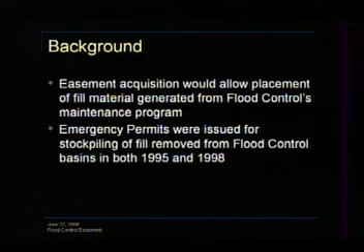Fill material from flood control projects has been placed on the subject parcel on 2 separate occasions in the past. In both 1995 and 1998, emergency permits were issued on this parcel, allowing the placement of a total of 6,000 cubic yards of material removed from flood control activities.

Government Code Section 65402C requires the planning agency to consider the location, purpose, and extent of the proposed easement for consistency with the comprehensive plan. I would like to note that the planning agency does not have the ability to condition a 65402 determination.

Along with other elements of the comprehensive plan, because of its location, the Toro Canyon plan also applies to the subject parcel. The project site is located at the intersection of East Valley Road and Toro Canyon Road. It is currently vacant and zoned residential.

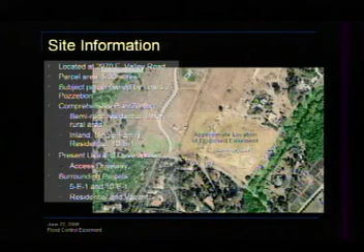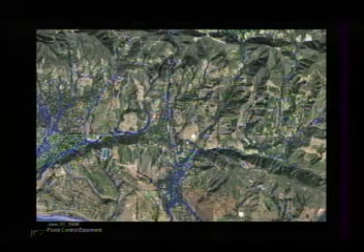As currently proposed, the easement would include the entire area of the subject parcel, APN 155120061, known as 2970 East Valley Road. The purpose of the easement would be to allow the deposition of fill material removed from flood control debris basins, channels, and watercourses. The easement would be used only for placement of fill. The amount of fill material to be deposited on the easement would be dependent on weather events and the availability of alternative sites. That quantity is unknown at this time.

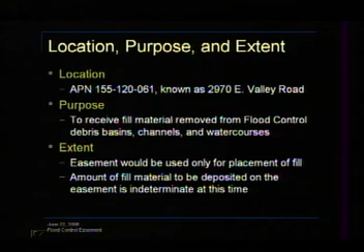The key policy considerations in this case are those policies protecting visual resources, grading policies, biological habitat protection, recreation, and noise. The following slides summarize the applicable policies and development standards.

Because of its location, topography, and lack of vegetative cover, the subject parcel is visually prominent from both East Valley Road and Toro Canyon Road. If visual impacts of the grading activity associated with the proposed easement are minimized with mitigations, such as appropriate landscaping, fill minimization, and fill dispersal, then the acceptance of the proposed easement would be consistent with these policies and development standards.

Additionally, the land use element contains policies promoting minimization of grading and protection of natural landforms. Staff acknowledges that sediment material removed from flood control elements and watercourses must be deposited at some location. Depending on the quantity of fill material and the manner in which it's placed, the acceptance of the proposed easement is potentially consistent with these grading policies.

As mentioned previously, a designated Southern Coast Live Oak riparian forest environmentally sensitive habitat is located opposite Toro Canyon Road. The subject parcel contains a portion of the required 50-foot setback from that ESH. Also, a designated wetland is located on the parcel immediately west of the subject parcel, and the Toro Canyon plan requires a 100-foot setback from that wetland. Although the easement includes these ESH buffer areas, flood control staff stated that grading activities would not take place inside these buffer areas. As long as the activity associated with fill placement on the proposed easement avoids disturbance to the ESH and ESH buffer areas, the acquisition of the proposed easement would be consistent with these policies and development standards.

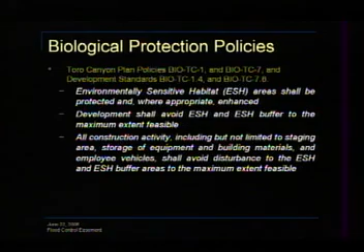A 10-foot wide trail easement is located immediately adjacent to East Valley Road right-of-way. Condition 2 of the parcel map that created the subject parcel restricted all encroachments within this dedicated easement, which would inhibit the safe use of the trail. The trail easement is not yet improved or in use. If the flood control easement is acquired, heavy equipment would likely cross the easement over the existing driveway which crosses the trail easement. The proposed flood control easement would be consistent with this policy and development standard if trail use is not established during its lifetime and if appropriate mitigation measures are employed, such as landscaping.

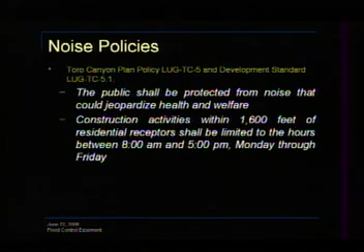The Toro Canyon plan includes time limitations on construction activities near residential receptors. The parcel map which created this parcel also contained a condition limiting the timing of the activity. If the most restrictive time limits were placed on construction activities allowed within the proposed easement, and if construction equipment was maintained properly, the acquisition of the proposed easement would be consistent with this policy and development standard.

In conclusion, pursuant to Government Code Section 65402C, staff recommends that your commission determines that the acquisition of the flood control easement is potentially consistent with the comprehensive plan and transmits the consistency report required by Government Code Section 65402C to the County Flood Control District and the Board of Directors of the County Flood Control District. The staff report and the letter reflecting the Planning Commission's action would constitute that required report. That concludes staff's presentation.

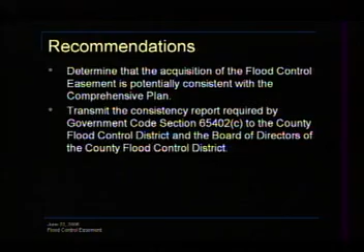Thank you. Any questions? Commissioner Brown. Thank you, Mr. Chair. I see that Ms. Spencer from Flood Control is here, so I have a question for her.

Mr. Gullett indicated that grading will occur near the ESHAs, but it'll stay outside of the setbacks. How do they know where these setbacks are? When they're out there grading, do you go out and inspect? What kind of assurances are there that these ESHAs are in fact protected?

Good, Commissioner Brown. Basically what happens in emergency situations and also routine maintenance is both myself and other flood control personnel are out at these sites. We could easily flag these areas and keep people out of them. Okay, thank you. All right, thank you.

Commissioner Cooney? I have a question for flood control as well, although Mr. Gullett, you should feel free to chime in. It looks to me that the prior use of this particular parcel for the deposit of flood materials has actually changed the landform already.

I noticed that twice emergency permits were used, but in the second instance, at least, a land use permit was issued to allow the material to remain in place. And what it looks like to me from the corner of East Valley and Toro Canyon, there's actually been an increase in the elevation of the property, which is creating a wall-like feature at that corner. So someone approaching that looks at this substantial deposit of former fill. Is that an accurate perception? Is it actually building up what was the natural altitude of the land at that corner?

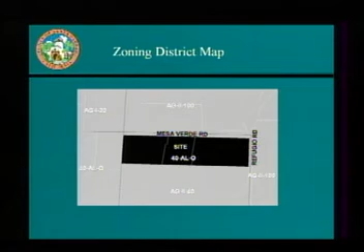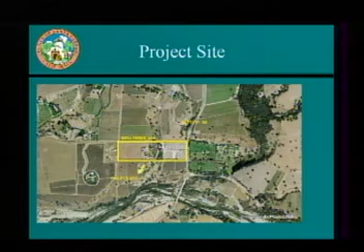This slide shows the site itself, and from it you can see that the facility is easily divided into 3 sectors: the upper, central, and lower sections. The next slide shows this in a little bit more detail.

The proposal in front of you encompasses the activities of an existing equestrian facility that has been in the area since the 1960s. It provides an arena and riding facilities for approximately 400 members of the association, with an average of 6 members and their horses using the facility daily. There is also a therapeutic riding program using the facility 3 to 4 times a week, with 6 horses that are the only permanent residents, other than the people.

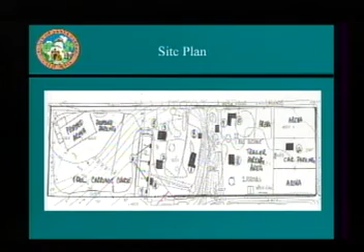They also request to host 39 equestrian events and 1 fundraiser each year as part of their conditional use permit. The next slide shows the trailer parking area and the 2 arenas on the right that are consistently used for horse shows—one for warm-up, the other for the horse show itself. It should also be noted that figure number 8 on this map is a 240 square foot horse shelter that has been designated for removal in order to protect the stream bank of the stream that runs through the middle of the property.

The proposal today is for a consistency rezone from 40-AL-O to AG-II-40, and a major conditional use permit to validate an existing daily use of a commercial, albeit nonprofit, stable riding and boarding facility with a maximum of 40 special events.

These events have been divided into two categories, conducted between April and October annually. This site has traditionally had between 12 and 24 events and presently holds approximately 30 events. The applicant is asking for an additional 10 events, to be identified later, but limited to fewer than 100 attendees.

The two categories we've divided the events into are: events which involve humans and horses, with attendees divided approximately 75% participants and 25% assistants and spectators—people coming to help the participants. You can see the numbers for each proposed event.

The second category is events that require the importation of cattle, including cutting, team penning, and team sorting. We've averaged the number of cattle to be roughly equal to the number of horses in these events, even though the cutting shows will probably use more cattle than the team penning.

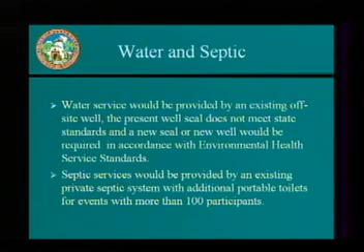As far as services, the fire station at Airport Road provides fire protection. Access is provided via Mesa Verde Road, and the parking areas on this site can roughly handle 60 trucks and trailers and 28 cars.

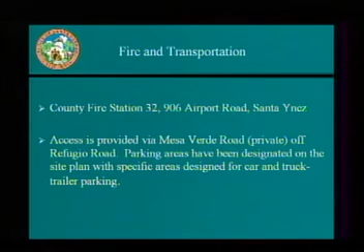The project as proposed has been determined to be consistent with all applicable comprehensive plan policies and zoning ordinance provisions. I would like to note that the findings in the staff report refer to the Planning Commission, but they should refer to the board.

We would like to recommend that your commission's recommendation to the board include the following 4 items, and I'd be glad to take any questions.

All right, thank you very much. Any questions? All right, we'll go to the applicant.

The applicant would like to speak. Thank you. Mr. Rigel?

Chairman Valencia and members of the commission, thank you for the opportunity to speak before you today. Can you hear me all right? My name is David Hunsaker, and I'm currently the executive director of the Santa Ynez Valley Equestrian Association.

I'm relatively new to that position, having served previously in the mid-90s during the formation of the organization as its president, and have been asked to come back on board to help them hopefully get this conditional use permit granted and deal with several other financial concerns we have there.

I'd like to start by saying we have a deep appreciation for the work that Shelley has done on our behalf, and we find nothing within her requirements that we feel we could not live with. If you would allow me, I'd like to give you a brief history on our center.

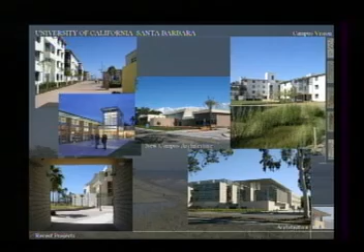This building's currently under construction. As you know, we have a lot of construction on the campus if you've been out there recently. In fact, the last one that comes up is one we're really excited about.

Upper left is our new graduate student housing by Fields Devereux, Los Angeles. This is on the historic campus site, on the west side of campus out by the historic fields. 976 beds of graduate student housing with 976 parking spaces. If you drive on El Colegio today, you'll see this. It's a huge construction site, 4 blocks long.

It's hard to miss. Top right is our new student resource building. This finishes this summer. It's by Sasaki, San Francisco. This is essentially a student meeting building. It's a piece of what used to go into student centers across the country. Those centers have turned into more of a retail complex, and this sort of building is growing out of that, because student groups still need a place to meet. We're not the first to build this, but I think this is a very interesting building for its social diagram.

Center of this slide is a building by Kallmann McKinnell & Wood from Boston. 3 buildings, actually. Michael McKinnell's the lead designer. He designed Boston City Hall. Again, a very exciting complex.

The building on the left of the 3-building complex is our new Center for Film, Television, New Media. It's a fully donor-funded building, the first fully donor-funded building on our campus. I think this is an important trend for the future of the campus, what you'll be seeing more of. This is funded by a series of donors, including some of our alums.

Very exciting. The center building is a social sciences building. The right building is our new Graduate School of Education. We hope to start construction on this series of buildings this fall. We're in the middle of, like any project that's bid recently, a series of budget issues that we're working on. I think we're pretty close.

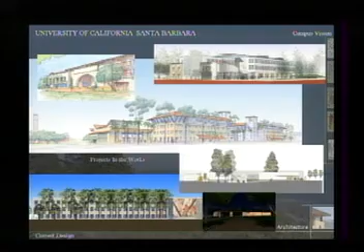Lower right, a project we're very excited about, in the early design phase, is a new gate for the east entrance to campus. If you come to campus today, starting Monday we've ripped up the road, there's a lot of construction activity out there. Ultimately, we'll have a new stone gate feature. You can see the night version of it there.

We're going to have a new driveway. The stoplight goes away, and a circle will be built in its place. There's a lot of change for the east side of campus. All new landscaping, graphics, really transforming the east side of campus.

We like the ocean, the lagoon, the mountains. There's a theme: the East Bluffs, the Pardall Corridor, the landscape corridor, the academic green on the east side of campus, and the rec facilities. We didn't really identify our buildings as a strength on this campus. We said really the strength of the campus was the piece of real estate, the surrounding, this sort of asset of being in this incredible location.

Things we didn't like about the campus: some of those old military buildings, the trailers, cargo containers—both of those are disappearing this summer, by the way. We were out this morning again looking at that. Loading docks with ocean views—this has already been taken care of.

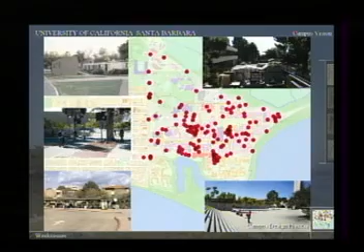We're working on it: the plaza, historic plaza, the bus drop-off, which is just sort of a tough space, and the interface between bikes, pedestrians, and cars. This is something we've grown used to, but urban designers and planners really have a hard time with that interface, and how do you fine-tune it? We love the bikes—they're a great alternative means of transportation for this campus, but it is difficult. The interface is a bit difficult because the bikes don't stop, as you know, if you've been on our campus.

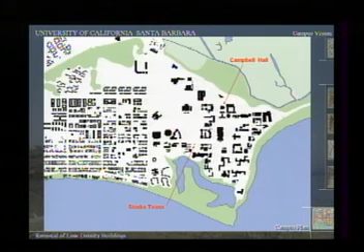In terms of density, this was a figure ground drawing—you've seen these before from architects. Black represents buildings, white is open space. The left side of the slide is Isla Vista, which is a very fine textured, high density area. On the right is the campus, which looks fairly built out. Architects do these drawings to see where you might find space for future development, to think about how you might utilize the campus. If you take away the military buildings, the trailers, the containers that have turned into offices, and I think one permanent building, you can see that a lot of open space opens up on the campus.

Think about connecting those spaces. You suddenly see these great malls that can cut across the site and really connect it out to the ocean, the mountains, the lagoon. The big idea here is to connect the core campus to the landscape, to say, okay, this is our great asset—how do we utilize it to its maximum potential? We know today that if you stand in the middle of the campus, you oftentimes can't see that site. We want to rectify that.

Another major space goes from Storke Tower, again leading up to a mountain view on the north. Probably the most important is a north-south space that goes from University Plaza and our new alumni house down to the lagoon. Then secondary and tertiary paths across the campus, again always oriented to the view. So you're creating these great view corridors out from the site.

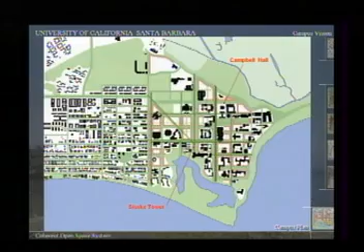Overlaid with open spaces, what you might see in terms of quadrangles and the parks that would develop in and around the campus. Building sites—because when campuses do this, we're always interested in the carrying capacity: what could you build on this site if you did decide you were going to grow? This starts to establish where building sites might occur, and then in red, where those buildings might be a little more formally, and finally what they might look like in a detailed plan.

This represented, when we first studied this, about 3 million gross square feet of space. We have about 5 million gross square feet today. So it's a lot of capacity, but that includes things like parking, housing, academic space, support space. So it's probably not as much as it sounds, but it does suggest that the campus can meet if we were to grow to 25,000 students, as Jean just outlined—we can definitely handle that capacity. We have the capacity for that growth.

This slide was established just to show how much we're doing today—again, it's about $1 billion. I think that's the number the chancellor is using now, through the year 2010, from 2003 to 2010, roughly $1 billion worth of construction on the campus. It's everywhere, it surrounds all the edges, so the transformation is happening today as we speak. If you go out there today, I could stand you in places that you couldn't see the ocean before, and you can see it now. I'm very proud of that because we're building this plan incrementally, which means it's a realistic, doable plan for the campus.

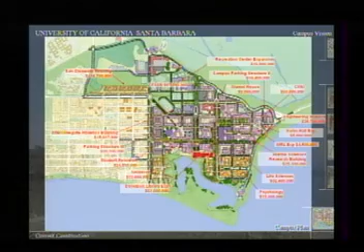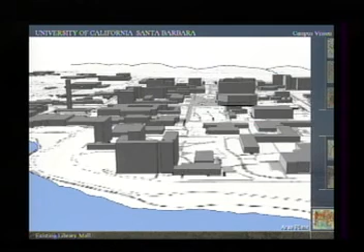The little one-story buildings at the bottom were built under that plan by Charles Luckman early on the campus, and they blocked ocean views. So you take away some of the small buildings, establish where new buildings might go that reinforce the edges of spaces, and suddenly you see new spaces develop that really are great campus spaces connecting the mountains to the north, the ocean to the south, and really creating the ability to move through the campus in a clear, logical fashion, which frankly today we don't have.

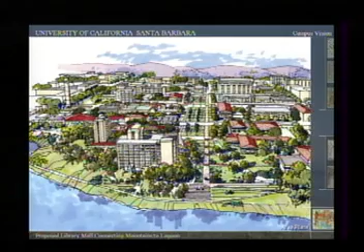The campus is a very difficult place to navigate unless you know the campus. So this is really a chance to establish this clear hierarchy and ordering of a campus that really wasn't developed around that sort of planning. It has a very nice common sense approach. This is developed, by the way, not just by the campus, but with Urban Design Associates from Pittsburgh, who I think have done a great job of helping us through this process.

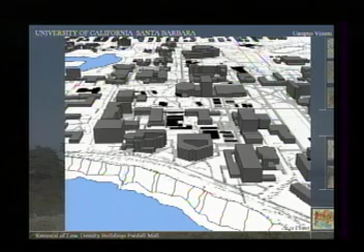The east-west parallel extends from Isla Vista on the top of that slide down to the bluffs. There are a series of small buildings in the middle that block this. You can see there's almost a mall here. Take away those small buildings, and some of those buildings will fall down if they're not taken down, and you suddenly see sites for new buildings, and then the parallel extends all the way from Isla Vista to the bluffs.

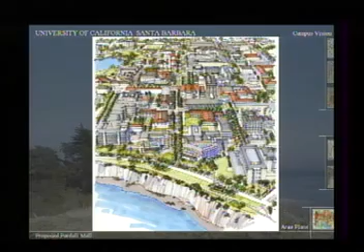This is probably the most important student space because the students move through this corridor all day long. They really want to get from where they live, which is Isla Vista for the most part, to campus and back again. Right now that transit system across the campus for bicycles really breaks down at the library, and this gives a clear path across the campus. So the potential here for huge change, and I think fairly easy change, frankly.

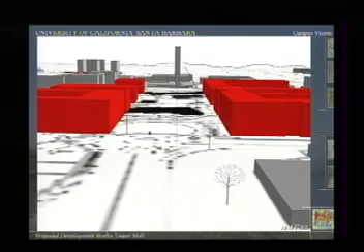Another one I think that's important from a community perspective, that's the old gym in the middle of the slide with a sort of barrel roof. It's currently painted red, Storke Tower in the background. If you take away those buildings, which are mostly built by the military, or their trailers, you can see a lot of open space that opens up in the center here. Potential for new buildings left and right. In fact, the building on the right is much smaller scale than it's shown there because that is the new Center for Film, Television, New Media. And then what that might look like finished.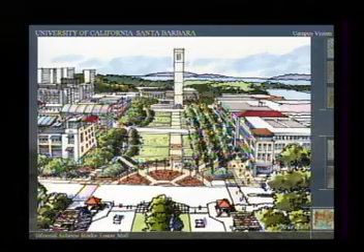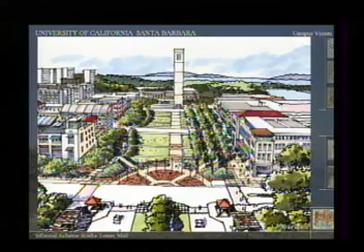And this has a new transit hub at the bottom, a proper place for buses to arrive on campus. The bus is very important for us. We're having very high ridership these days because we're offering free bus passes if you give up your parking pass. And then pedestrian entry to the campus. So you leave the bus, you become a pedestrian, you actually can understand how the pedestrian engages the campus, and then Storke Tower is a marker that helps you find that portion of campus. So again, clear logic is a big part of the planning idea here.

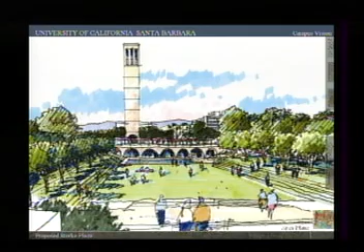The housing plan, which is what we said we were going to show you, we're not going to let you down there. The areas here shown in color, primarily orange or terracotta, are areas that we've identified for housing on the site. What we think we need to do is build housing both for our students, faculty, and staff. Because of the high cost of housing in Santa Barbara, Jean talked about the numbers of faculty members who will retire over the next few years. Even without growth, we think it's critical that we build housing to be able to keep people, to both recruit and retain faculty for this campus.

And also student housing. I think we do a good job of managing student housing, a fantastic job, and we know that that helps the academic experience. We also know that it probably helps ultimately Isla Vista if we house some of our students, or more students, on campus. So these are the areas we've identified. They are largely already developed sites.

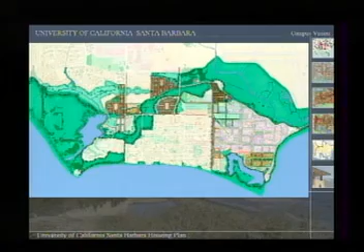We know this is important to the community. We're not going into ag land, we're not going into wetland areas. We're really setting back from the open spaces, protecting those spaces, and building higher density housing within envelopes that are already housing sites, with the exception of one along Ocean Road and the one in the sort of center top, where the facilities management site is. My office will be wiped out.

No loss, right? This is the historic housing site in the final condition. Each of these neighborhoods, we call them neighborhoods because we see them as communities that have faculty, staff, and students. It's not segregated into those. The usual way of building this kind of housing is you build faculty housing in one location, staff housing in a different location, and student housing in a separate location again.

We really like to see them combined. We think that's important in terms of building an academic community. Each of these communities has a parking structure at the center lined by housing. It's the kind of planning you can probably only do in a place like the university, where you can really regulate who lives in the housing and how they live there, frankly, in some ways.

Outside of that, there's courtyard housing and then lower density housing at the edges. So the top of this slide backs up to the Storke Ranch community. The idea is when we back up to the community, we try to match the scale of that community, whether it's single family houses or duplexes, but generally the scale of a single family house where it meets single family houses, and higher density in the middle where there's lower impact.

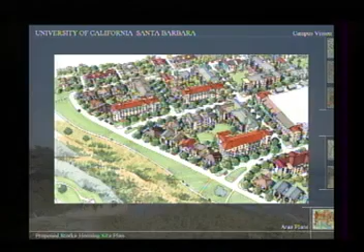As you can see at the bottom of the slide, this is currently open space that is not developed in any way. There are no pedestrian trails or bike trails to this area. So what we've done is, the wetlands are obviously there, we have the normal setbacks, and then within that setback plus some extra landscape space, there's the opportunity to really develop this into a park. So you have these linear parks that connect all these projects together, really based upon the existing assets, just the assets that we don't use today.

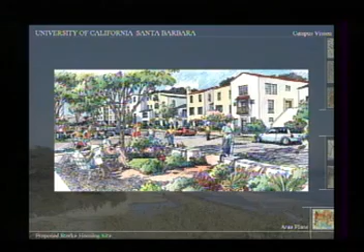This is what it feels like being in that community. You're now looking out from that parking structure site toward the courtyard housing. There's a chance for a small amount of retail in this area. We're thinking about convenience, grocery stores, coffee shops, the sort of things you'd expect to find in a neighborhood. If you were in downtown Santa Barbara and some of the older neighborhoods, you would find those amenities.

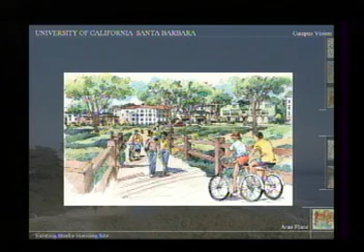You can see that even though we're adding quite a bit of density here in terms of numbers of units, we're really not changing the character. Those are today 3-story buildings, and largely we're putting 3-story buildings back, just more of it. By the way, this project basically triples the density, so you go from around 300 units today to 900 units.

Each of those sites does roughly the same thing. It's between 2 and 3 times the existing density, which is how you justify knocking it down and building new—you can get a lot more on that same land. And we think, by the way, it's a better living situation on the same pieces of land.

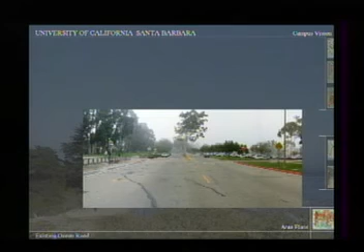Again, a very important project, I think, in terms of the town-gown relationship. Isla Vista is on the left in this slide. On the right are the parking lots, which we're currently building buildings on. I need a new slide here, but this is the west edge of the core campus.

This is a 4-lane road that goes nowhere—it goes down to the beach. It's an old planning idea. These were ideas when you divided the campus from the community. These were the mechanisms. Whether you were in colleges on the East Coast or West Coast, this is what universities did—we divided ourselves, we put up fences and barricades. We're suggesting that this is not the way we'd like to live in the future. We really think it's important to integrate the community with the campus, and there's a huge opportunity here.

This came largely out of the planning process for Isla Vista, something Diane and Jamie Goldstein back there were very much involved in, and we really built on the ideas that came out of that master planning process.

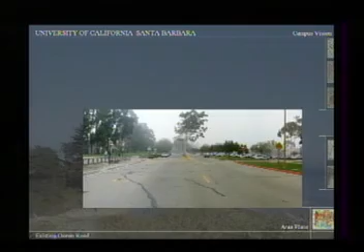So what we're suggesting is that we narrow that road to 2 lanes. We believe it can handle the capacity. In fact, if you look at the slide, it's always empty. There's never any cars on that street. It really is a 4-lane road to nowhere.

So you can take the street, narrow it, and build quite a bit of housing here. We get about 560 units. This is one of the few sites that is a greenfield site, because obviously there's nothing there but those berms and fences today in the existing road.

So there's huge possibility here to really change. Imagine now you're coming from Isla Vista, rather than having the barriers, you suddenly have an extension essentially of Isla Vista into the campus, and the campus and the town really meet each other in a nice way. So this is more akin to Nassau Street at Princeton or the street edge at Chapel Hill for University of North Carolina. So a really changed environment on the west edge of campus.

Again, this is looking westward towards Isla Vista. This is the primary entrance to campus on the west side today. It sends a very interesting message, I think. It's 2 lanes of bikes, and the drawbridge can go up at any time. It's not exactly friendly. We propose to take that down.

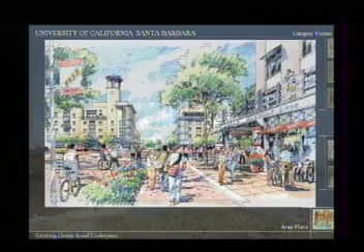And this would be the changed condition - you'd still have a bike lane, but instead of having the tunnel, you have a much more integrated street, bicycle, pedestrian environment. And this is also a better, I think, transition from the bike paths of the campus to the bike system in Isla Vista, which we hope we can work on some with the county.

And then the new housing that goes along that edge of campus - studio apartments, townhouses, loft apartments, a real mix of units. Again, we see students, faculty, and staff all living in this housing together. So really a changed image for the west side of our campus.

Looking from Isla Vista, because we thought, well, what does it feel like from the community if you do this? I mean, we were really worried about the scale from our side, but also from the other side. And this does not incorporate the additional density that's in the master plan. So you're really going to see here the existing condition, existing buildings with our new buildings behind it.

If the master plan were built out, and I think there are two options, a 3-story and 4-story option, they become even more compatible. But you can see even in this slide that with the current condition, 2- and 3-story buildings on Pardall from Isla Vista, our buildings still feel fairly compatible with that current condition because we step up. We're lower scale at the back and we step up to our condition.

We're adding a tower there. We think that these marker elements are very important. They mark the entrance to campus. They tell you there's a university over there, which frankly today that little tunnel doesn't give you a very good message about - a major institution that we are so proud of isn't really symbolized by the tunnel that we have today. So this is, again, a great change, I think.

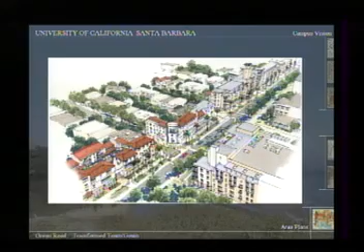And then that's what that whole project looks like from the air. Again, you can see the streets in Isla Vista are connected through, if not for vehicles, they're at least connected through for pedestrians and bicycles. We'd like to work very closely with the county to see if that's the right solution. We certainly believe that you could probably open some of the streets for vehicles and it would make a better living condition, especially for our students who frankly are a big part of the population out there. So we see huge potential in terms of that linkage.

Thank you. That was very good, Mr. Fisher. Commissioner Montgomery.

Speed presentation. Mark, it's good to see you again. You've got a great touch.

Are there funds available within the university's budget to do the same kind of renderings for Isla Vista that you've done? Because we really need to start integrating Isla Vista, and I know you feel strongly about that as well.

We've actually done a couple of renderings that we supplied to the county, done by the same renderer, and I think they're in the master plan document, if I'm not mistaken. So yes, we have, I think we did 2 in that first round. We have 2 renderings that we've supplied with 2 different height options, by the way.

The second, more substantive question is I've been very much concerned about the jobs-housing balance generally. There was a lot of flurry at the state level years ago, handbooks were prepared, but not a lot of follow-through. It's increasingly obvious that the good news is we have more jobs, the bad news is we have more jobs. How do we address it - is it 1-to-1, each new student is a new house or unit for that resident, each new faculty? Are you projecting this based upon having a good jobs-housing balance? Because if so, it would be a great standard for us to look at throughout the county.

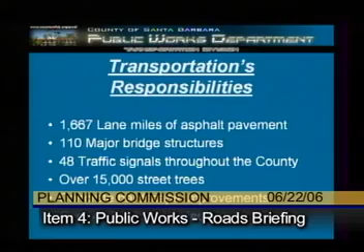Thank you, Phil. Commissioners, as Phil said, my name is Scott McAlpin. I'm the Deputy Director in charge of Transportation, and he mentioned we build things, and we love to build things in transportation. Our responsibilities—we put a slide in here so you could get a little overview of what we do. We have approximately 1,667 lane miles of asphalt concrete pavement throughout the county in all 5 supervisorial districts. There are 110 major bridge structures throughout the county, crossing creeks and so forth.

We have 48 traffic signals throughout the county. That number also includes flashing beacons and radar signs that we put up around schools for pedestrian safety, Safe Routes to School programs. We have over 15,000 street trees—these are trees that were planted when development went in throughout the county in the unincorporated areas.

And along with that, we have hardscape improvements. And that's actually one of our challenges in the Transportation Division, dealing with the type of trees that they put in next to curb, gutter, and sidewalk in more of our urbanized communities. So we see that a lot.

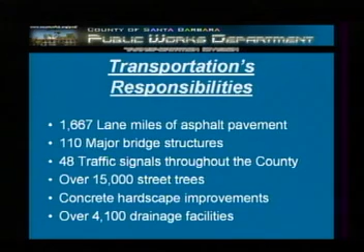And approximately 4,100 drainage facilities throughout the county of Santa Barbara on the 1,667 lane miles, primarily designed to take water from one side of the road to the other. We're charged with maintaining that.

And how we take care of this infrastructure is essentially through 5 sections in the division. You're most familiar with our traffic folks, our traffic safety folks who come and make presentations to your commission. We also have an engineering and design section. We try to do a lot of the public works project design in-house. We maintain a staff of engineers and technicians who are very good at that type of work.

And one thing I'd like to add too, as a public agency, a lot of public agencies don't do that. A lot of public agencies go out and contract all that work. It comes in tremendously handy for us when we have emergency events, because we have technical people on staff who know how to go out and respond to these emergencies that we get. And as you know, we get 100-year events every 3 or 4 years in Santa Barbara County, so it's needed.

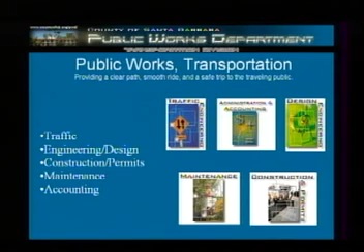We have a construction and permit section. They're responsible for actually going out and administering the construction of these projects we design. The permit section also deals with encroachments when people want to build things in the road right-of-way. Our maintenance section is responsible for maintaining the pavements, drainage facilities, what have you, throughout the county. And our accounting section, they pay the bills.

So at this point, I'd like to turn it over to Will to run through our presentation.

Mr. Chair, Commissioners, thank you for having us here today for this presentation. My name is Will Robertson. I'm the Senior Transportation Planner with Public Works Traffic Section. Earlier today, you met Brett Stewart, the Traffic Section Manager, on a 65402 determination. We're here today to go through our presentation, Transportation and Land Development, and we'll go ahead and start.

I'm going to start off with a real brief history of transportation planning and how transportation planning actually evolved.

History has shown us that transportation planning and land use have always been closely related. When towns are small and people settle, they find that towns grow and need more sophisticated modes to get around town. However, as towns were small, most people realized that a lot of the land uses were easily accessible by foot. To add to that, populations were dense and the land uses were mixed.

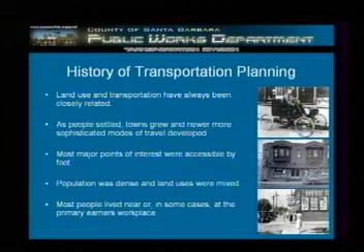So it wasn't uncommon for people to live near, or in some cases, at the primary earner's workplace. Through time, rail and trolley evolved and allowed people to actually live further away from their primary workplace. And along with that, retail and service businesses followed. This led to an expanding economy, and also the increased revenues allowed for more urban expansion. Yes, we all know this is urban sprawl.

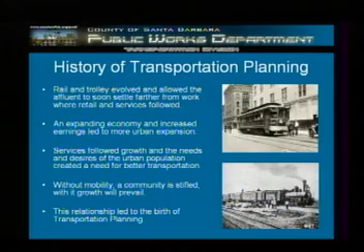And again, as the expansion occurred, more services followed, but the primary workplaces still remained in the central city. So people found the need to get to their primary workplace in a more efficient manner. This is where basically the birth of transportation planning started, trying to get these people from their rural environments to their primary workplaces. And of course, without mobility, a community is stifled and growth will not prevail.

So what is transportation planning? Now you hear terms like circulation, flow, congestion, arteries. Well, these are all vital functions to the human body, but in transportation, we like to believe that transportation is also essential to society. But more importantly, what is transportation planning? Transportation planning is defined as the area within transportation that deals with the relationship of land use to travel patterns and travel demand, and the planning, evaluation, and programming of those facilities.

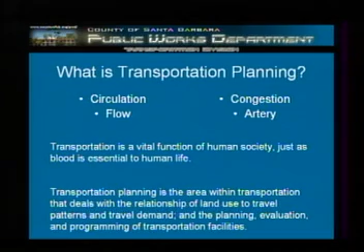So here we have listed some elements of transportation planning. Primary areas are traffic safety, traffic congestion, and the mitigation of that congestion. And we gauge the congestion through something called level of service, which you guys are very familiar with. We also create area transportation improvement plans, and those plans are funded with traffic mitigation fees.

Transportation demand management is sometimes something that we will encourage developers to do to also mitigate traffic congestion. And then we also have standard county roadway improvements.

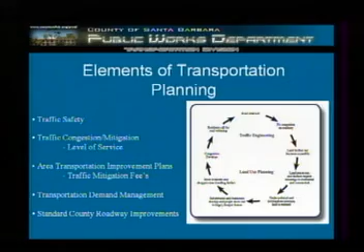In the white box here, I thought it would be good to add the transportation land use cycle, and how essentially transportation planning is broken into two critical areas: traffic engineering and land use planning.

This slide is great because it shows how land use planning and traffic engineering affect the overall land use cycle, starting with basically no congestion on the roadways, which leads to land further away from areas becoming accessible. Of course, people move there and land prices rise.

That's where farmers see the need, because of the rising land prices, to actually rezone their land to either residential or commercial. This leads to political pressure and rezoning, and once that happens, subdivisions are built on the outskirts of the town.

This brings in more residents, and now shoppers are traveling further into town, which causes congestion. People require wider roads because they're tired of waiting to get into town, and the road is widened. That's when the process starts all over again. So this is a fundamental and very critical process.

So let's talk a little bit about traffic safety and what we look at when reviewing a development plan for traffic safety. The first thing we always look at is access and circulation elements, which would include sight distance, number of access points, internal circulation, and parking required for that development.

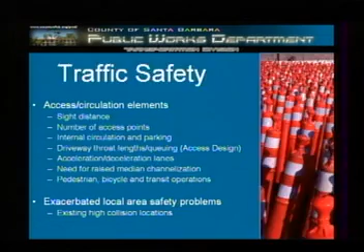Another critical area we look at is basically local area safety problems: are the roads currently experiencing a large number of accidents, or do we anticipate, because of the development, that accident rates will increase? We use a number of reference tools when we review a development plan or project.

Probably the most important of all of them, in both transportation planning and traffic engineering, would be the American Association of State Highway and Transportation Officials book, what we call the AASHTO book. It's a policy of recommended guidelines on geometric design standards for roads, highways, and streets.

Another reference tool that we use quite often is the Manual on Uniform Traffic Control Devices, which we also call the MUTCD.

My most important reference tool in reviewing projects would be the Institute of Transportation Engineers, or ITE, Trip Generation Manual. This is the publication where I look to a set of national data that gives me trip generation habits for individual land uses.

Another item is the Highway Capacity Manual, and that tends to be more of a reference manual for Caltrans facilities, but it is still used by a lot of local jurisdictions.

A lot of times when we're reviewing projects, we would go to area transportation improvement plans to see what type of improvements may be needed as development expands throughout a community. Currently, we have what we call the GTIP, the Goleta Transportation Improvement Plan, and the OTIP, and both of those are for build-out scenarios of the communities.

Also, the county every year looks at the 5-year Capital Improvement Plan, large projects that need to be funded by the county. And we also look at developments to see what their impact would be on these facilities mentioned in the CIP.

Probably the most common condition in a condition letter on a project would be the need for the developer to pay his traffic mitigation fees.

Currently, the Goleta transportation fee for a single home is $11,305. In the Orcutt area, that's $2,833, and in the Santa Barbara, Montecito, Summerland areas, $1,663. All the other areas of the county pay $448 per single family home.

Your first question would be, why are these fees so high for the Goleta area as compared to Orcutt, Santa Barbara, or other areas? The simple answer is that the transportation and infrastructure projects needed to keep the area functioning are a lot greater in the Goleta area than in the other areas. We review this each time we review a TIP, and over time these fees may drop or they may increase.

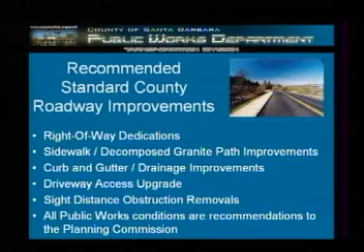Sight distance obstructions are common. A lot of times there may be an overgrown shrub or tree in the way that blocks the ability for a car coming out of the driveway to see safely and perform a maneuver, so we would have those sight distance obstructions removed. I'd just like to note that all public works conditions are recommendations to the Planning Commission. You do have discretion in whether or not you want to accept those.

Transportation demand management is something we encourage developers to include in their plans. They include carpooling, bicycle facilities, food courts, childcare, van pooling, and there are TDM incentives. Public Works also funds a position for the alternative transportation manager, who actively pursues these TDM measures throughout the county.

Probably one that's big right now is the Breeze bus. It's up and running in North County, and it allows shuttle service between Lompoc and the Santa Maria area and Vandenberg.

Another area we dive into, of course, is CEQA analysis. Once all our recommended conditions and a brief overview of any development are brought forward, we consult with the applicant through the subdivision review committee, and then if planning and development feels it's necessary, we go through some kind of CEQA analysis.

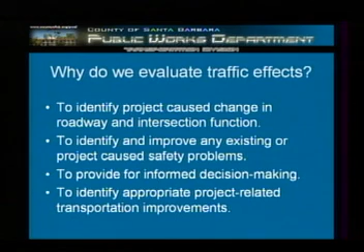We measure those effects through level of service analysis. Currently our standard is the ICU methodology, but you could also use the Highway Capacity Manual, as mentioned earlier. We look at roadway volumes, signal warrants, and almost every project goes through a sight distance study immediately prior to subdivision review committee.

Planning and development holds the CEQA threshold guidelines, which we apply to each project, as well as the Circ. Element standards. Through SBCAG, we have a congestion management program that we also look to, to see if there are any impacts to intersections identified in that program.

So when do we really need a traffic study? Generally, I would require a traffic study if there are greater than 50 peak hour trips, but that's just a guideline. Sometimes if the intersections are operating at exceptionally good levels of service, that may not be required. That doesn't mean we don't look at it, but not all projects require traffic studies, and in that case we probably would do the analysis in-house.

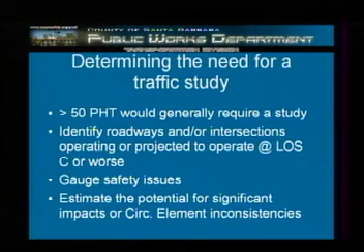We would also identify roadways and intersections that are operating at LOS C or worse, and gauge safety issues. If there are any blatant safety issues around a given project, we would want to do a traffic study to address those. We would also need a traffic study if there is an inconsistency with the Circ. Element or if a significant impact was identified.

How do we determine whether a project is consistent with the Circ. Element? We evaluate different point-in-time scenarios: the existing setting, existing plus approved, full cumulative (which is existing, approved, and pending projects), and then we also look at plan build out.

This is also a set of guidelines. Not all projects may require plan build out or full cumulative analysis, but if we go through a CEQA analysis, I guarantee at least one of these is looked at.

What are the county CEQA thresholds? There is an existing setting scenario threshold that basically reviews the allowable addition of project traffic to given intersections. And the allowable traffic is dependent on the level of service of that intersection.

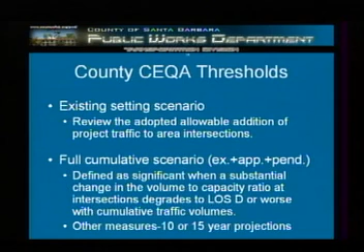Full cumulative scenario, significant impact would be a substantial change in the volume to capacity ratio at intersections when they degrade to LOS D or worse. And then sometimes we look at 10 or 15-year projections for consistency with the community plan.

Other things identified in the CEQA thresholds: there is a safety threshold, basically talks about existing accident history and the potential for future accidents. And there are roadway capacity numbers that we check to make sure that they don't exceed.

Identifying and evaluating mitigation measures. When we apply a mitigation measure, it must be feasible. It must be linked to the project impact or to the circulation element inconsistency. And the analysis must identify any residual impacts.

Also worth noting, payment of fees is not considered a project-specific mitigation measure, but it can be considered as cumulative mitigation for the project.

What are some other policies that we look at? We look at community plans, transportation improvement plans. We look to planning and development and encourage provisions for alternative transportation on all projects. We also look to guide them to put in road improvements such as bike paths, pedestrian walkways, bus pockets, and other site design enhancements.

And that concludes our presentation. We thank you for your time, and we're available for questions.